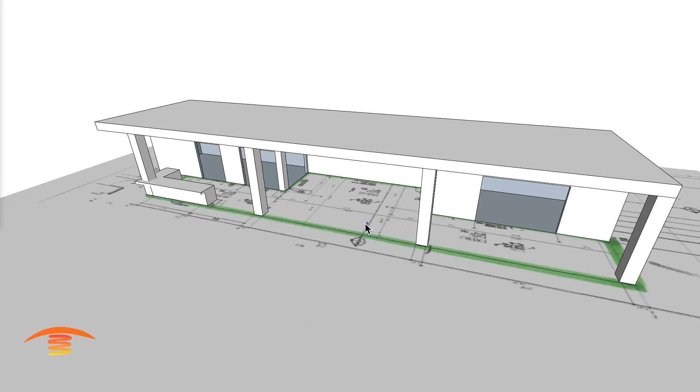Today I have this residential application. So what we have here is this very long section of the patio area. I know there's going to be a bar or at least a countertop over here on the left side, and then on the right side the customer said that they did not want any heating on that side, so that's fine.

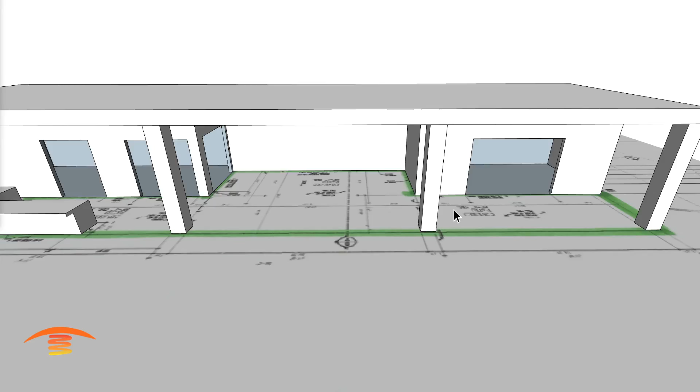And also there will be a window, a sliding door over here. And I take it that all these openings here will be slider windows, so I'm not concerned about doors opening up to the patio side. So let's go ahead and look at the dimensions.

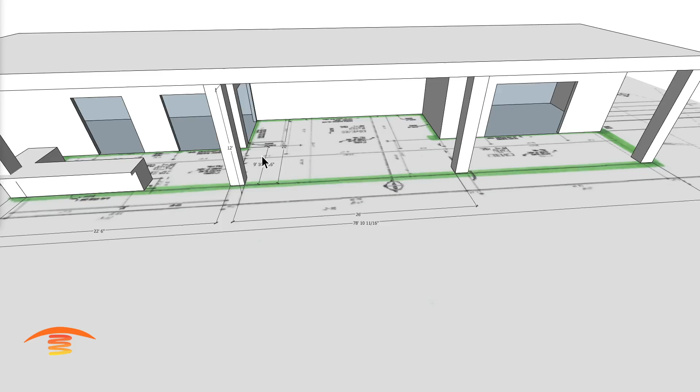Basically we've got this area here that's about 26 feet. The overall length is about 79 feet. And this section over here to the inside post is 22, and we're not going to worry about that right now. 20 foot deep here and about 10 feet deep here.

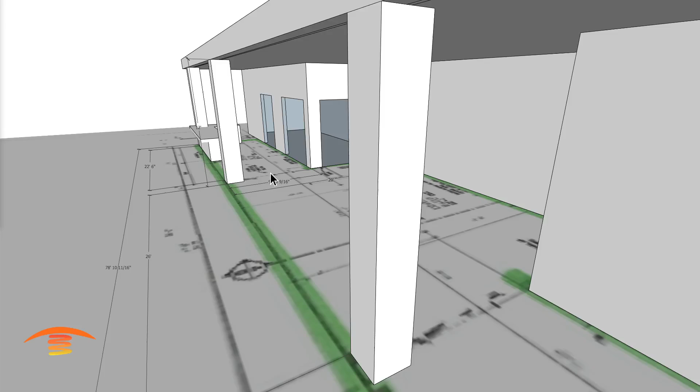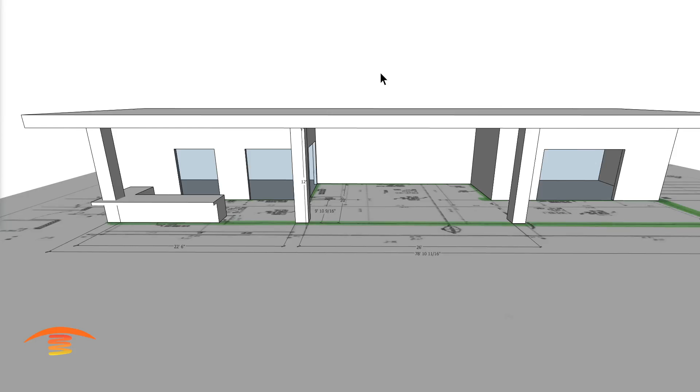I also have the height of about 12 feet, but the customer did say that this section of the ceiling is lower than the section that's back in here. So we'll have to figure out where that ceiling drop happens, but the layout will be pretty much the same. Do we want to use the same heater in that application? We could go maybe to a lower intensity heater, but in any case, there's actually two options I'm going to give you.

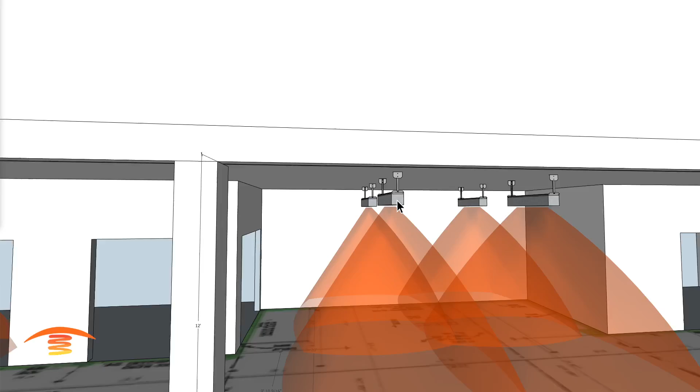So option one would obviously be gas heaters suspended from the ceiling, with a 13-inch drop, and then the heater is 8 inches itself. You can see that we've got coverage that's fairly good. These are 34,000 BTU heaters. You could use the TSH model, which gives you a 25,000 or 34,000 BTU option.

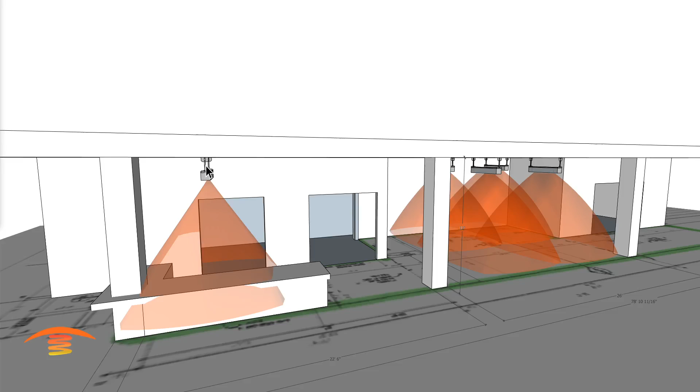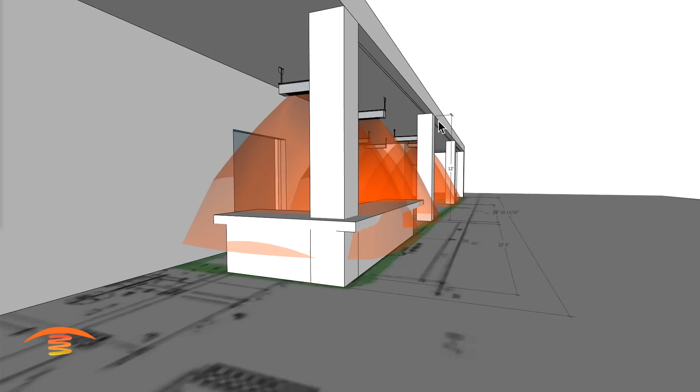And I'm not quite sure how this particular area is going to be used, but if we put another unit, let's just say 10 feet over, maybe even 9 feet, then we can get more coverage over here. But I'm not sure what the area here is going to be used for. You can see I have a countertop area here, and there's no heat that's going to come outside unless we put something on this outer edge.

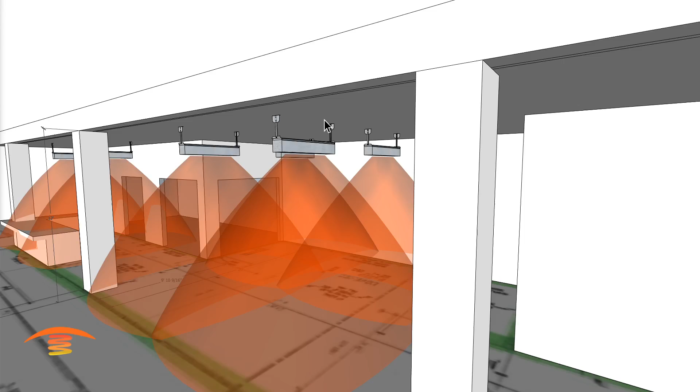Also, we have 24 inches of clearance from this edge to the wall, and that's true with the heaters back here. And there's no other obstacles I can see at this point other than that drop that we need to address, where it actually happens. It could be right here at this edge, and if that's the case, we should be fine because that's 18 inches. And then of course we have to look at this area here, whether we have 18 inches from this edge to the drop.

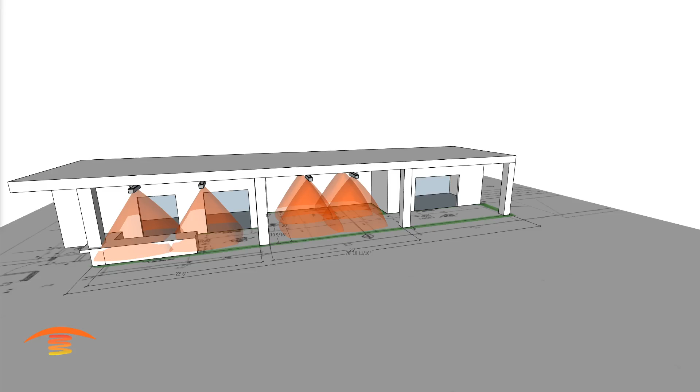So let's leave that at that for right now. So that would be gas units. This is just a preliminary type of evaluation right now. So with electric heaters, I think the customer is probably more prone to wanting the electric heaters.

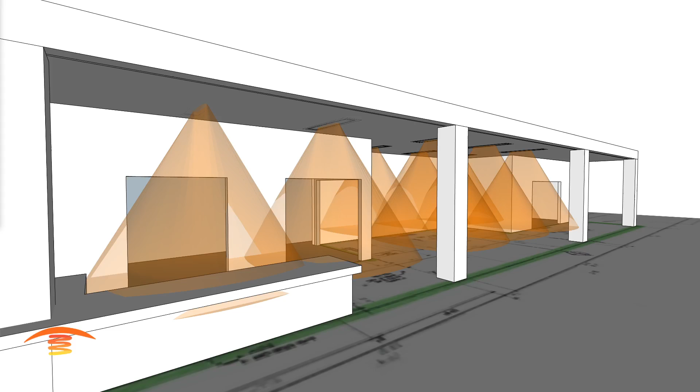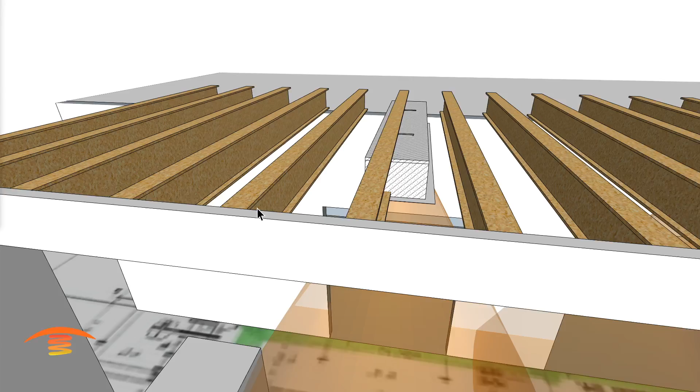And with electric heaters here, you can see I have these recessed, but the big point that I'd like to make is what is this construction like up here? You can see I have these heaters placed where I would like them, but I haphazardly placed these beams here running across. These are just some manufactured looking type beams that aren't to any type of specifications,

but they are 18-inch centers, and of course if they're 18-inch centers, then I'd have to move the heaters so that this complete unit would physically fit into that 18-inch center.

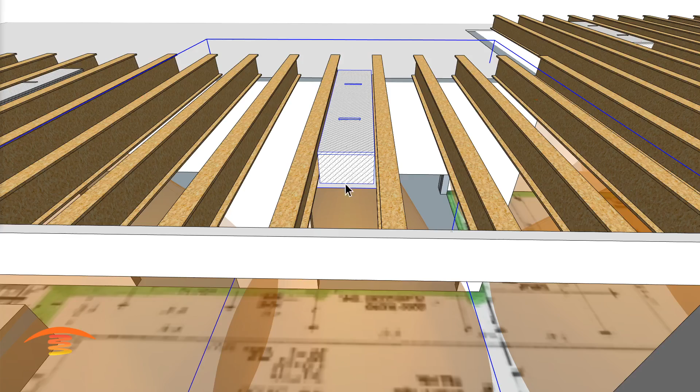So as long as this box fits in here, and this is 13 inches across, you would be fine with the layout. Now it just depends on where those members come across. And that's true with all of these. I'd have to move each and every one so that we can get them in their appropriate spot.

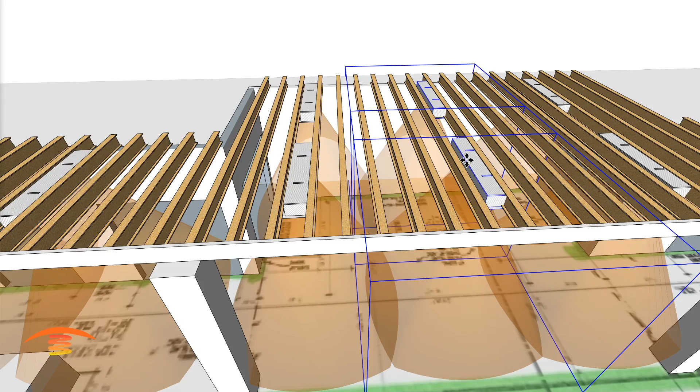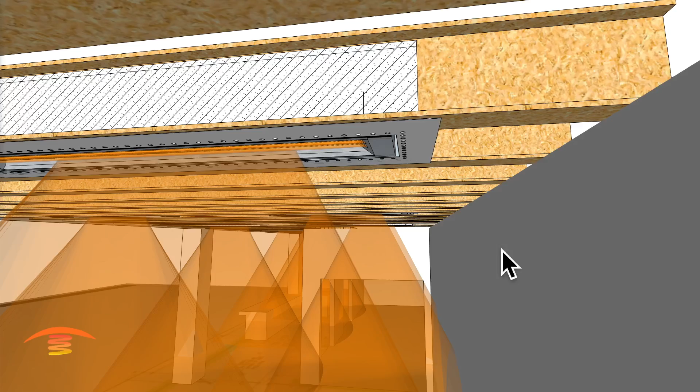Right now, well, at the beginning of this video, I had them at 9-foot centers from here to here, and then I believe it's 10-foot centers from here to here. I still should have my 18 inches clearance. This is where I started, from this edge of the heater to this wall and/or the glass sliding door. That would be 18 inches.

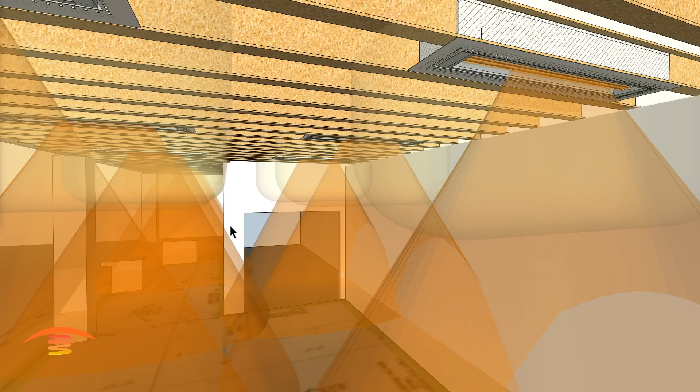If I turn down the clearance here, you'll see that I'm coming right up to this edge with the clearance of the heater. So that's the heater edge here. This is the frame. So that is 18 inches there. That is going to be true too if there's a drop. Again, we need to be concerned about that. And you can see, I believe this meets the 18-inch clearance over here. I may have to move that just slightly, but I'm pretty sure that's 18 inches. So we should be fine with that, and it is.

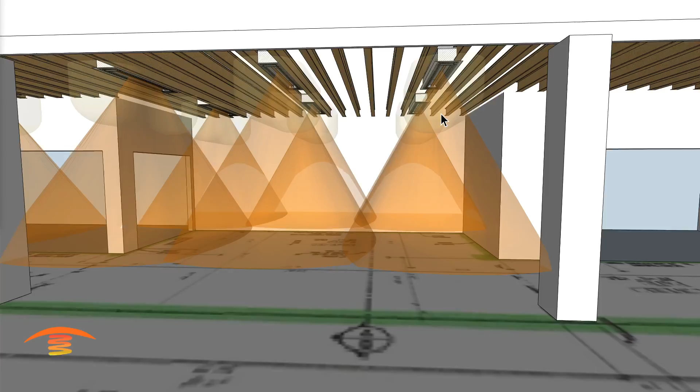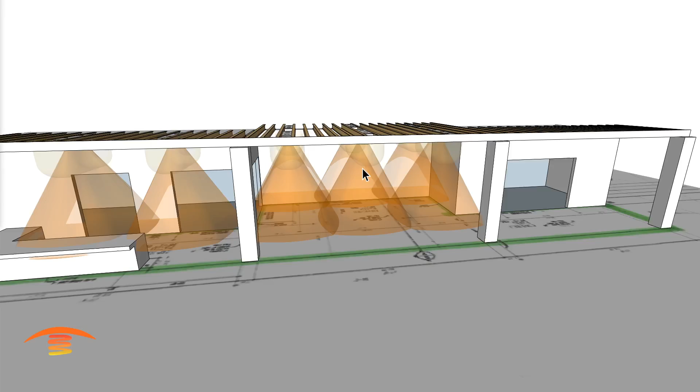So here we have the CD 6024 6,000 watt 240 volt units. They run at 25 amps a piece. You can see we have quite a bit here, and that's why I'm showing the gas option, because these are 25 amps, so there's 150, 200 amps there already, and you'd have to upgrade your panel most likely for something like that. So in any case, that's this option here.

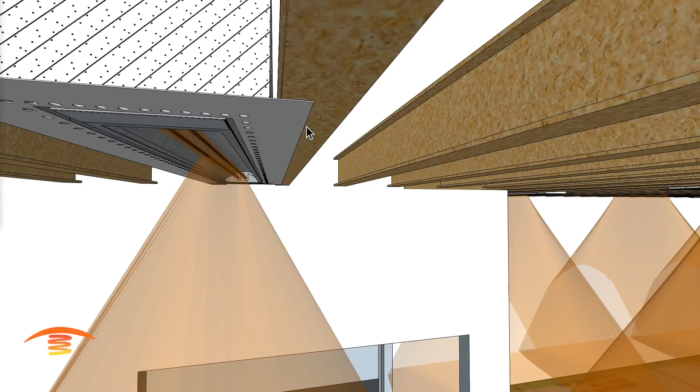Now you also might notice, let me just turn this bottom clearance off for a second, I've left a little gap. So you see this little gap here. It's 3/4 inch of a gap, so you could put the stucco behind this frame, or you can come all the way up to the edge here of the holes and mount this flush mount kit to the wooden structure, let's say. So I'll just move this real quick. Move it up, and I'll move it down just slightly.

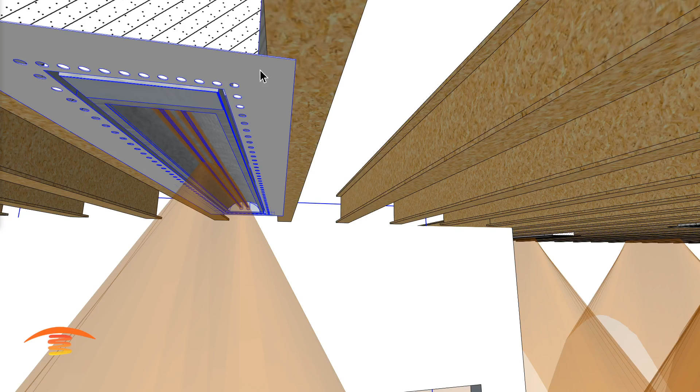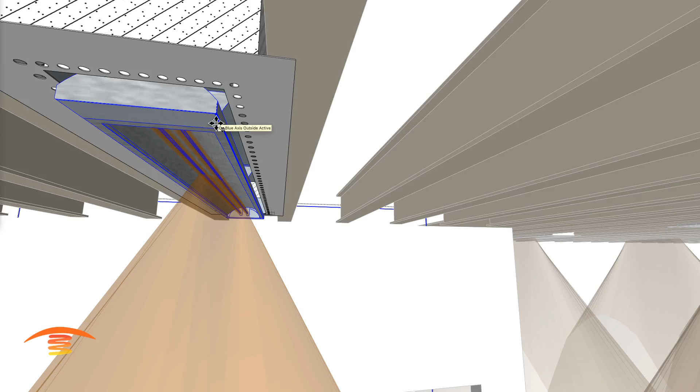So you could bring the stucco all the way up to, but not closer than 1/2 inch to these holes. So this would be the holes, and then the stucco would be there. Now if you're using wood, then whatever the height of the wood is, you'd have to take the heater and move it down. Let's say the wood is going to be 1/2 inch wood, so you would just move it 1/2 inch down, and now you have the clearance again.

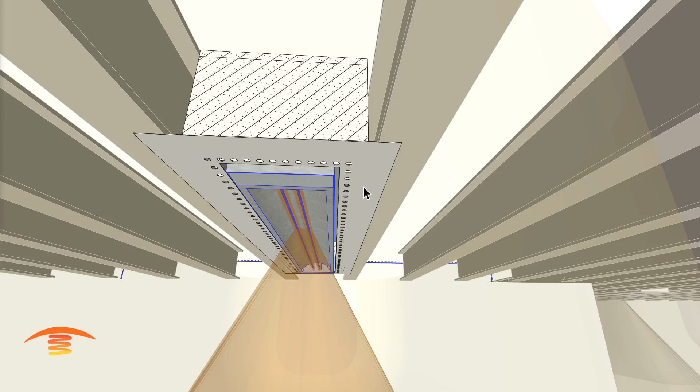And let's go back to that clearance. The clearance below would be with the heater face itself. So here you have the heater face and the clearance here. So it's 1/2 inch lower than if you were to finish this edge up with like a tongue and groove wood type of finish. So that just depends on how you want that done.

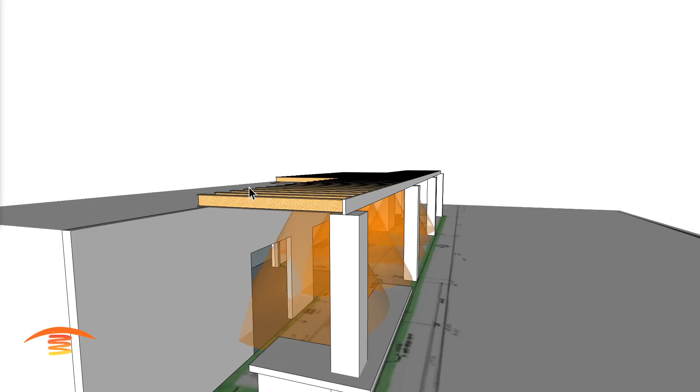So again, this is preliminary. I'd like to probably speak with this particular customer just to see what kind of power they have, and what other type of issues we need to iron out here, basically, so that we know what this depth is over here and where it starts and things like that.